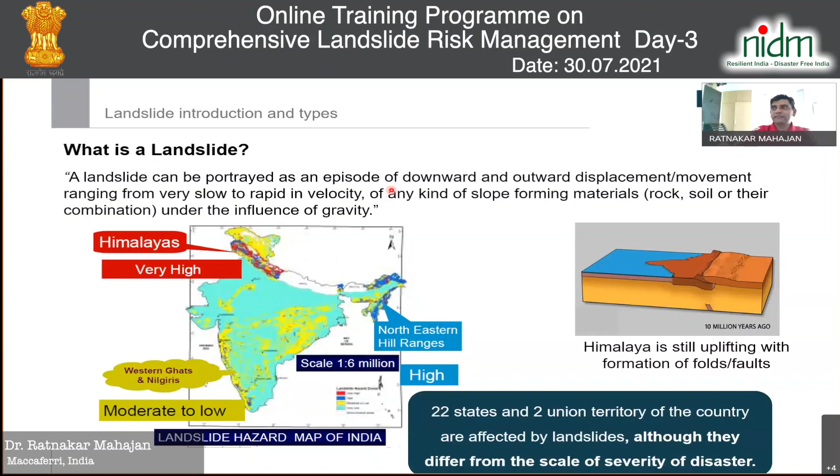So it's one of the major hazards present all over, and usually it gets triggered by, I would say, a mix of different natural factors like rainfall, seismicity, wetting and drying, and other seismic factors. Depending on the type of material you have and the type of geometry, there could be different types.

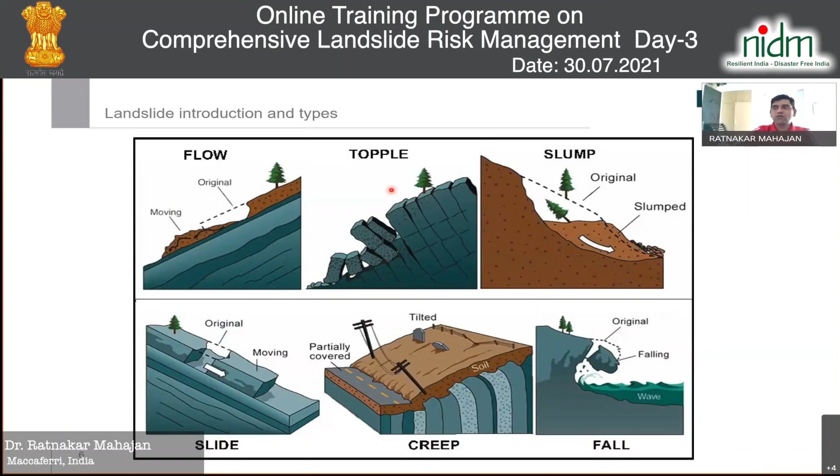There could be a flow of material, or a toppling of rock mass. It could be a complete slump, or due to creep movement of the soil, or the complete structure itself is creeping over a period of time, or there are some overhangs which can fall over a period of time. Typical landslide in the Himalayan region, as well as from one of the project sites.

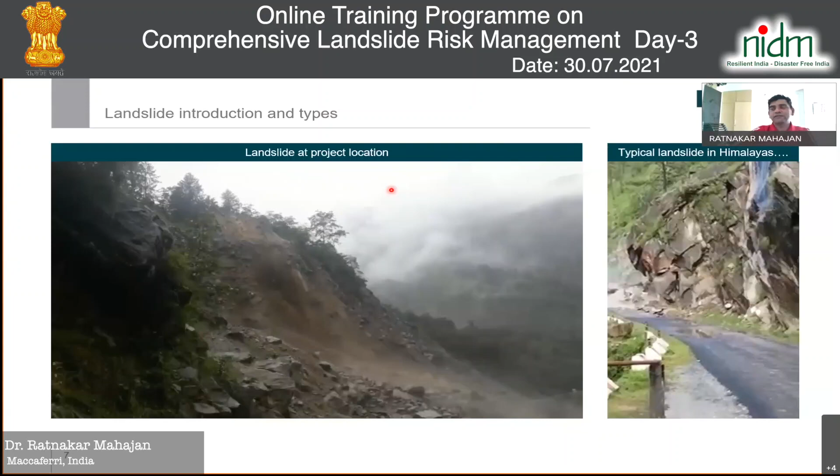I would like to just play this. So one landslide is basically from project one. So you must have seen in previous videos, now you have all kinds of material in this, and you cannot say pure rockfall or something, but it's a landslide with a number of things getting mixed together.

So of course, when we are approaching the landslide, we have to approach with investigation of various factors which are really triggering this instability. It could be natural factors or anthropogenic activities like improper land use or deforestation. The factors could be seismicity, precipitation, if it is at high altitude probably a melting of snow, or could be volcanic eruption, the type of structure, the slope, hydrological, geological conditions, and geotechnical parameters of the material.

So we can relate these landslides to the hazard, and then we can come up with landslide mitigation. For example, if you have an event or a landslide which can occur frequently, but has minor injuries, we may not be worrying that much, or if it's a very minor injury but a remote or improbable possibility of happening, we can categorize it as a low risk area. Whereas if it is a catastrophic hazard that can happen frequently, it could be very high risk.

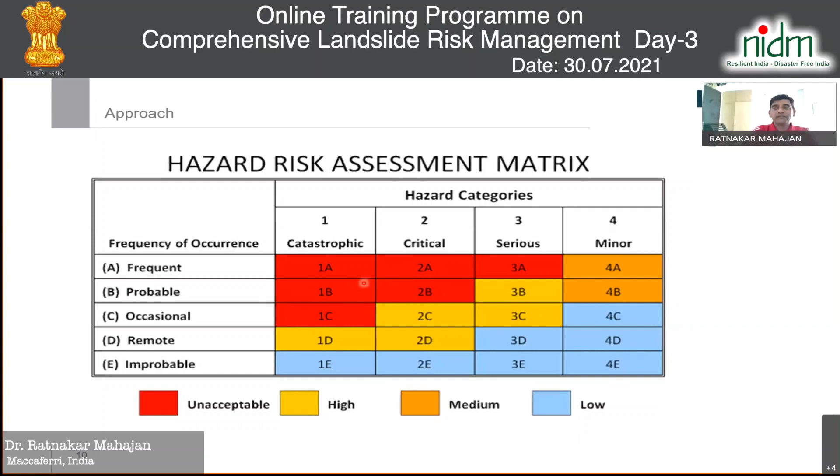So a person who is attempting to mitigate this will first, before mitigation, try to understand what is the risk associated with that landslide, what exactly is going to be affected, and how important it is, because the protection of the structures nearby or landslide stabilization is a cost, and that cost will be governed by the amount of risk you want to mitigate. And sometimes the landslide will be so big, is it really possible to mitigate? That's also a question mark, typically in the Himalayan region.

Now, what are the different types of interventions that can be thought of for this landslide? First, the simplest could be avoiding or eliminating the problem. So if you have something in that area, completely relocate it or remove the slide, or go for tunnels where these landslides will not affect your operations. Could be a railway line, a road, a hydroelectric power plant, or your town itself. If it's a town, then definitely you will need to protect it. But if it's some facility you can relocate, do that.

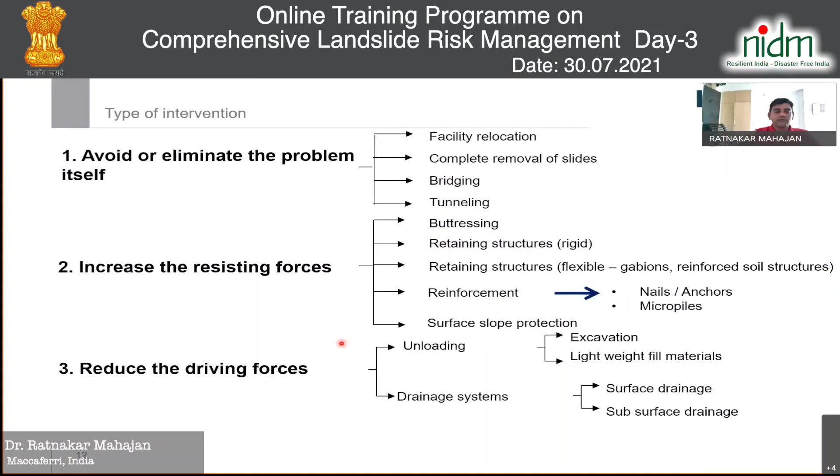The second could be to increase the resisting force. There are some driving forces for these kinds of events, so try to increase the resisting force. Could be in the form of buttressing or providing some retaining structures, rigid, flexible, or a surface protection. The other way around is to reduce the driving forces which are causing these instabilities, like unloading, removal of some soil mass, or improving the drainage pattern.

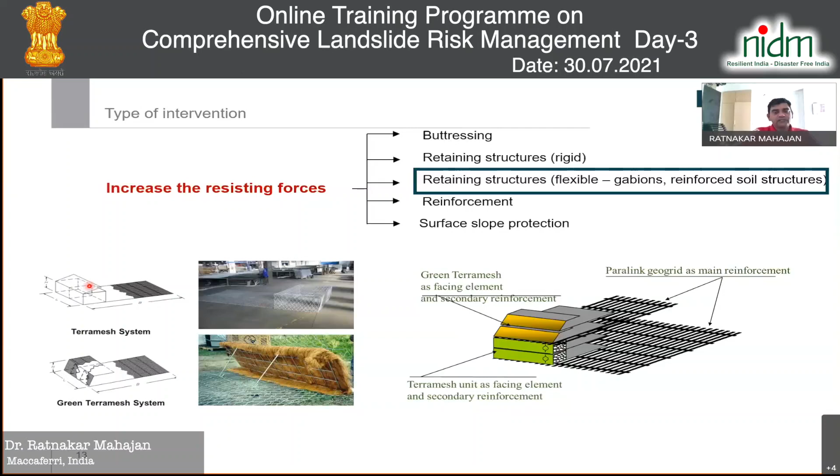So when we talk of retaining structures, today I'm going to specifically talk on flexible retaining structures that can tolerate some movements without losing their integrity. We typically refer to reinforced soil structures like the Terramesh and Green Terramesh systems, made up of double twist wire mesh. Terramesh is basically a gabion fascia with soil reinforcement. Because of the high porosity of the gabion fascia, you have a good draining structure, and because of the mesh, they are flexible structures. You can use these gabions for mass gravity or retaining structures.

So examples like these are photographs from the state of Maharashtra, Sahara Amby Valley, Lake City, where lateritic soil is present, which loses strength when it becomes wet. You must have read in newspapers that, typically in the western part of the country as well as the Konkan area, there are a lot of landslips happening. In that area you have a lot of laterites, which typically lose their strength when they get wet. So in one project, this problem was being faced by Sahara Amby Valley, which was treated by gabions effectively.

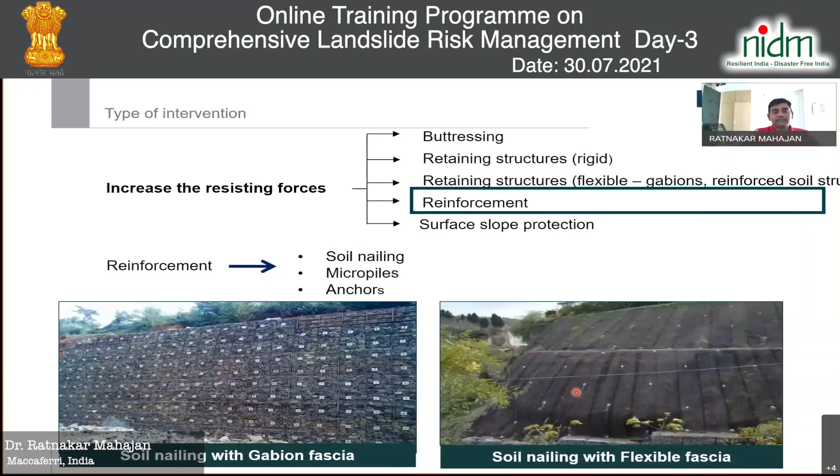When we have to increase the forces, the option could be soil nailing, rock bolting, micropiles or anchors. So you can combine these different options of soil nailing, micropiling or anchors with flexible gabion fascia, flexible synthetic mats or flexible reinforced synthetic mats to increase the resisting forces.

Or a simple way, as you might have heard from local people if you visit landslides typically in hilly areas: local people will say earlier there was a lot of greenery, but since the greenery is gone, there are issues of landslip. So if you are able to establish vegetation, that also takes care of a lot of things.

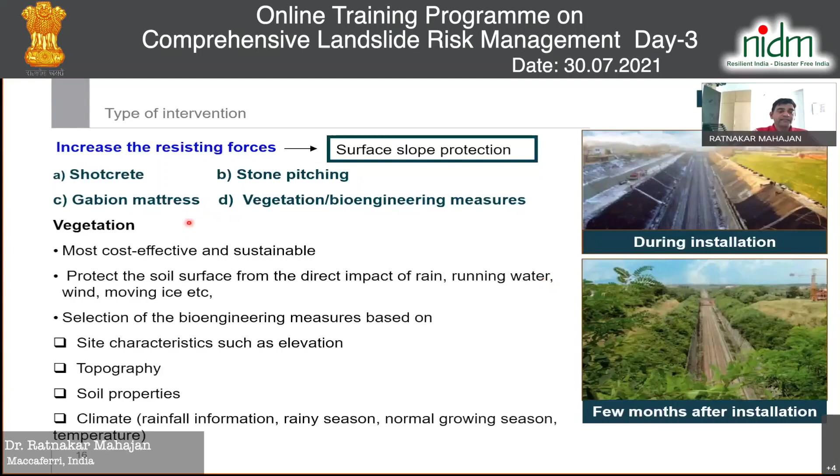Of course, if you take care of the percolation of water, it solves one of the major issues of seepage of water. So here you can do surface slope protection with the help of shotcrete, stone pitching, gabion mattresses or vegetation. A lot of options can be there.

For vegetation growth, it could be done by biodegradable mats like jute or coir, synthetic mats made of polypropylene, or synthetic mats reinforced with a steel wire mesh. The advantage of the biodegradable mat is that it degrades and provides manure for the vegetation growth, and it is easily available in India. This can be used for relatively flat slopes.

Where you are expecting delay in vegetation growth, these synthetic mats are good. And when you are going for very steep slopes, like 60, 65, 75 degrees, you can go for reinforced mats, let's say 65 degrees and above. The purpose of these mats is not to control the complete mass movement, but to ensure vegetation growth.

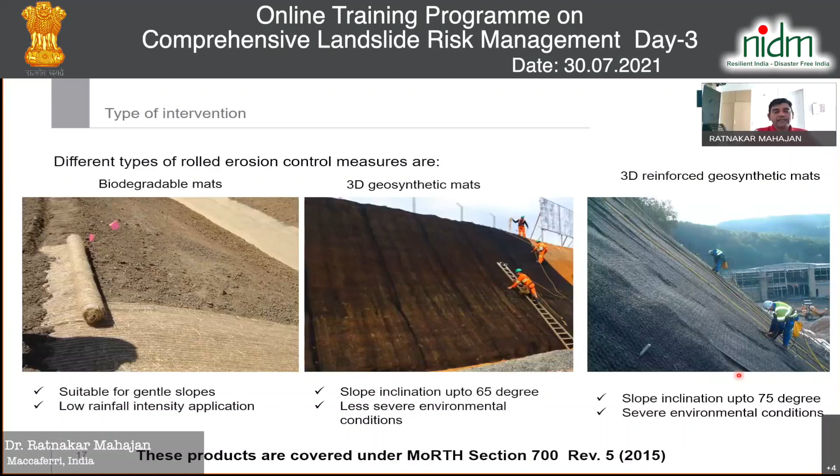Apart from mats, there are a lot of other solutions like hydroseeding or hydraulically applied erosion control measures. In this, basically, water is mixed with the seeds of the grass you want to grow on the slope. Along with that, you add a moisture retention pack of polymers, manure, and certain fertilizers depending on the type of soil.

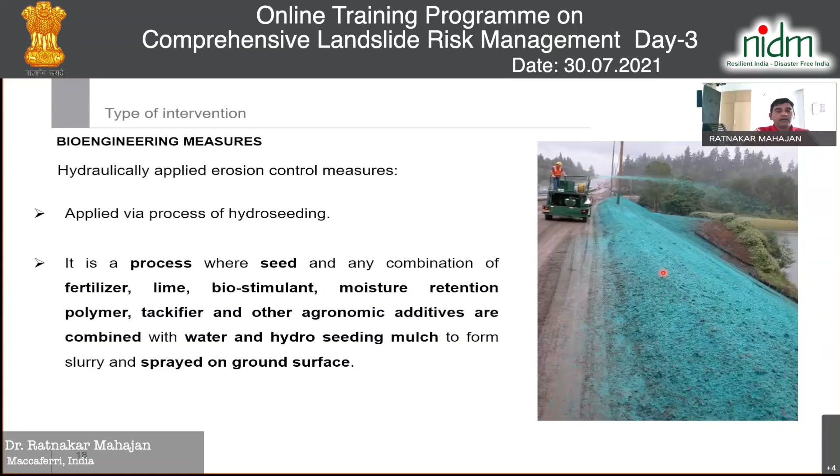So here the most important part is to study the soil, not from a soil mechanics or geological point of view, but from an agronomic point of view: understand how much organic matter is present, the acidity or alkalinity, and what deficiencies are in the soil for vegetation growth. Then you add this, spray it over the slope, and you get very good vegetation over a period of time. Of course, you need to maintain this area till you get good vegetation.

When we talk of landslides, there are issues of rockfall, which can be solved in a number of ways. The simplest way would be to put a mesh on top of the slope where small boulders or shooting rocks are coming. You might have noticed, before any big event, small portions of rock come down, giving a hint of possible movements, and then big masses start coming down, which can be a mix of rockfall and landslide together.

So you put a mesh on the slope and anchor it at the top; this is feasible for limited height and limited area. In case you have space at the bottom, you can leave this mesh open. If space is not available, you provide some additional anchors at the bottom. Whatever rock mass gets deposited in this mesh accumulates at the toe of the slope, is contained by the anchors, and later on you can remove it.

In case you want surficial stability of the slope, you can add anchors across the length and height of the slope. This is a very good solution for containing rockfall, but it is very expensive as it is covered by a lot of mesh. Alternatively, you can put a barrier: on the slope itself, you put a dynamic rockfall barrier which has steel posts and a steel mesh which can catch the falling rocks.

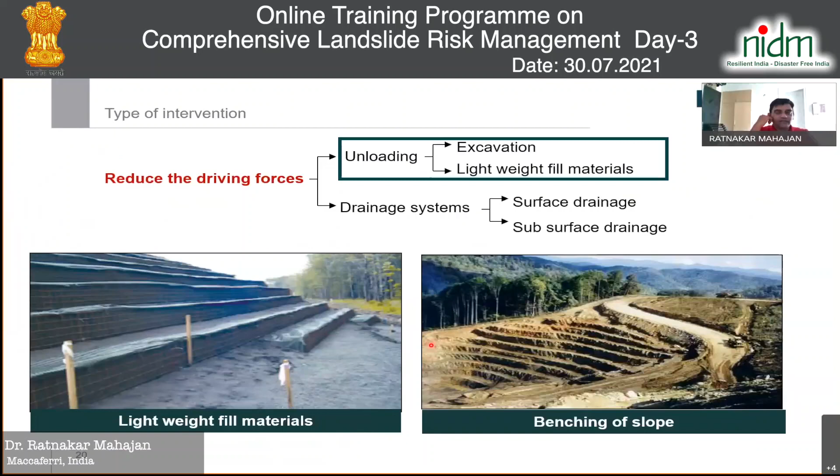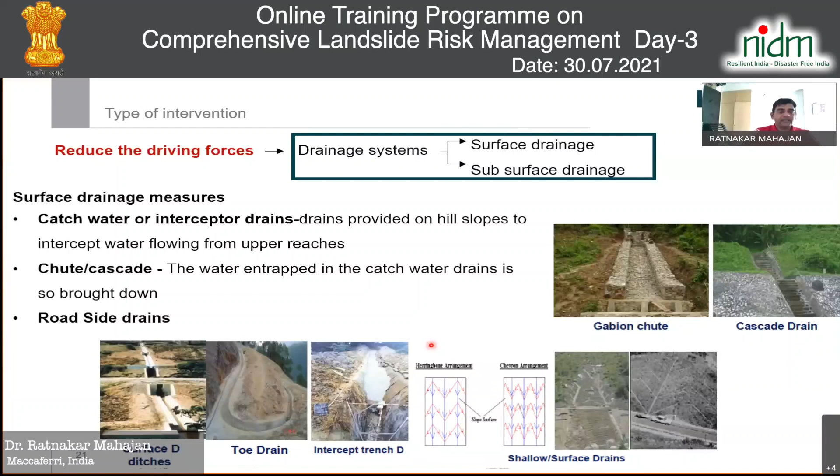And then very important is the drainage. This is the most important part. So study the site, understand from where the water moves, how it moves, and if you are able to remove the water from the site as early as possible, you are minimizing the seepage of water inside the slopes, and the possibilities of further mass movements get reduced. So there are different types of drains like gabion drains, cascade drains, ditches, toe drains, different types of drains to be put in.

Then after understanding the different interventions which can be done, a very important part is design planning, which is very critical for a successful project. Here you need to decide the type of investigation, survey, study to be done. Just to give an example, you have a landslide, let's say a 200-meter high slope, and if you ask the investigation guy to go on top of it where it's not accessible and do a geotechnical investigation with the help of bore logs, it's not feasible. So in such situations, you need to really mix the different types of investigations like geological, geotechnical, and geophysical, and then decide.

Visualize the different ground conditions, collect the data and correlate with the site details so that you understand what is being reported, in what sense it is being reported, and corroborate with the site conditions. Understand what would be the different stages of construction and how exactly you are going to execute the work. Use of local material must be given preference here, because you cannot bring a lot of material into such fragile terrains. Prepare a detailed drainage plan. Whatever excavated material you get, how you are going to handle it needs to be taken care of. Cut and fill should be balanced in such a way that you manage the work there itself.

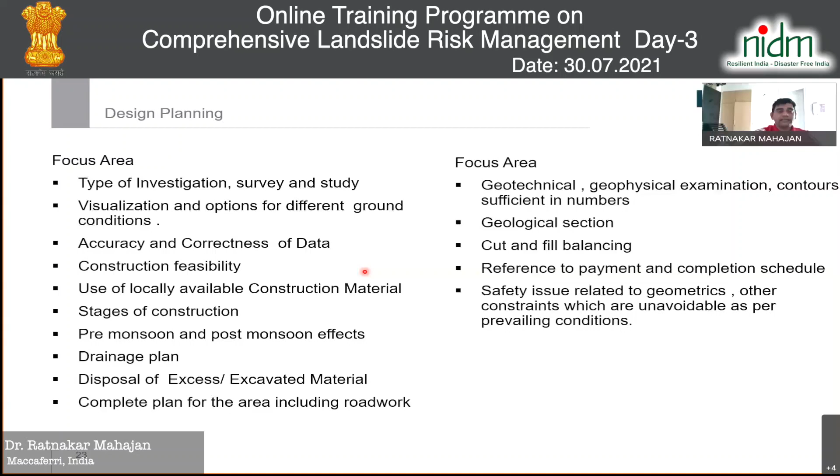After design planning, the most important part again is the construction planning. Like, what is the sequence of activities? Are you going to do excavation top-down or bottom-up? This will govern the type of machinery you will require, whether closure or complete stoppage of the work or the activities in that area. How you are going to handle these things during monsoon, pre-monsoon, post-monsoon needs to be worked upon.

And then most important is the cash flow. The contractor working on site must have a proper cash flow during the project, so that has to be ensured in the construction planning and design planning. You cannot have a bad cash flow for a contractor, otherwise he will not be able to execute the work.

So when we look at these landslides, you have various issues: possibilities of rockfall, possibilities of instability of slopes, which need to be stabilized with soil nails, rock bolts. You can have embankments if you have space to contain the falling rocks. You may need to provide retention structures, flexible retention structures, and drainage. Overall drainage of the site will be taken care of.

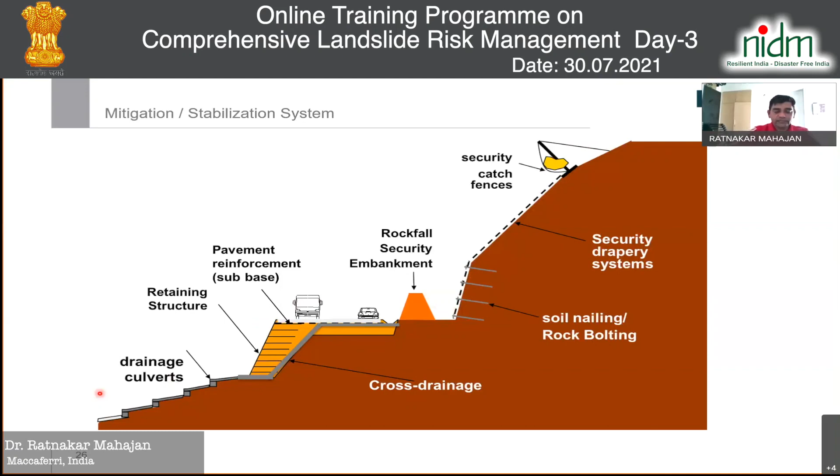So I am presenting one case study. This is landslide mitigation measures in Uttarakhand. This was part of the rehabilitation of the sites after the 2013 floods. There were actually 7 different sites in 2 packages. Due to time limitation, I will not be able to cover all of them, only 1 or 2 I will be covering. So here, 7 different landslides: Nandprayag, Maithana, Birahi, Gulabkoti, Helang, Govindghat 2 and 3.

This is where the project is. So why this was important is, Uttarakhand is a land of gods, where the beauty attracts a lot of people for tourism, for pilgrimage, and most importantly it is a hub for religious travel, like Chota Char Dham, as well as people visiting Badrinath. So that becomes a very important aspect to be taken care of.

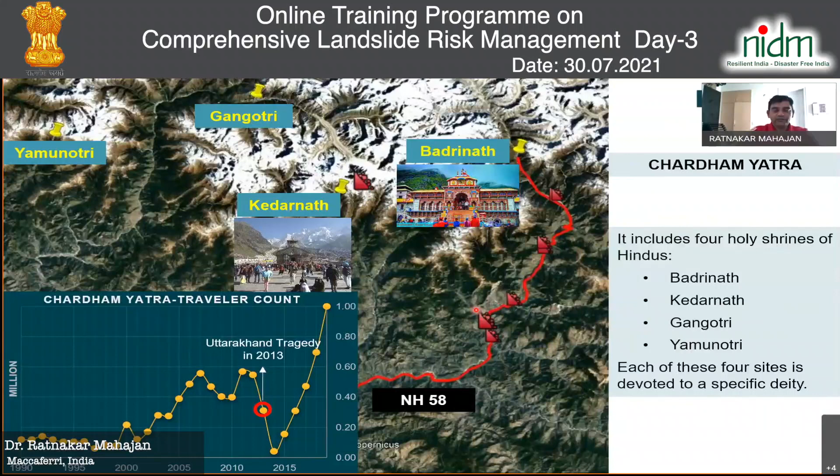So if you see data of people traveling since 1990 till 2013, there was a rise in people visiting Uttarakhand. But after the Uttarakhand tragedy, there was a dip, and then again it started going up, because you have this Char Dham Yatra, and a lot of devotees specifically visit these areas. 2013, I need not mention, everybody knows, was one of the big disasters, and a lot of people lost their lives, very tough stories.

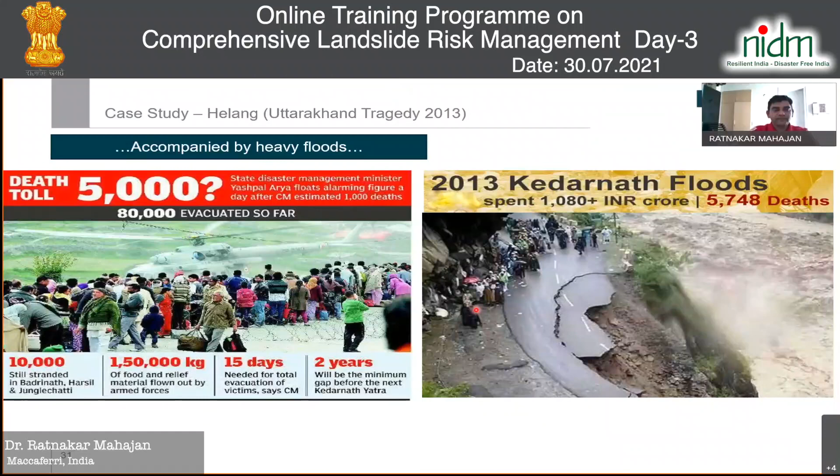So this is on NH 58, covering the different landslides starting from Nandprayag to Govindghat. In this project, the requirement was geometrical improvement of the road and widening of the existing 2-lane road, which will be safe. And the challenge for this project was to keep this road functional during the construction. You cannot stop the road for the yatra. So that's very important.

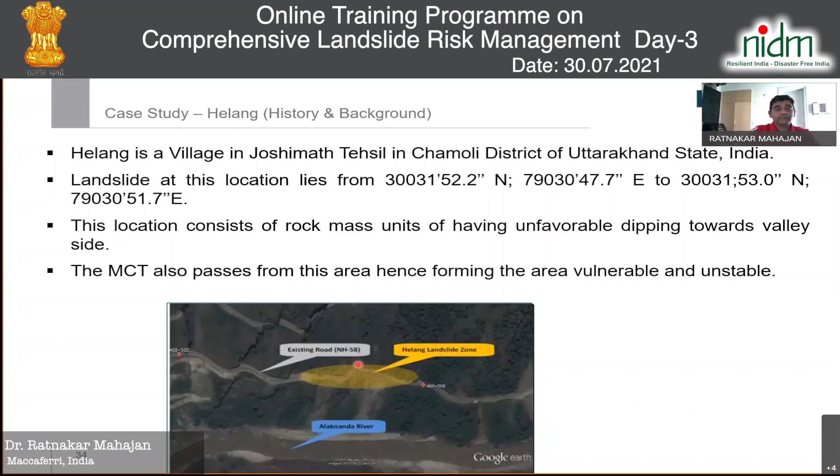So at the beginning, site visits were done to try to understand what could be the probable issues. There were some blocked drainages on the hillside. There were some handmade wire crate walls which were getting settled on the valley side. Over a period of years there have been different floods as well as cloud bursts, and the valley side was found to be sinking, and the rock mass has dippings towards the valley side, which is unfavorable, and very important, erosion of the toe of the slope near the river, which could get washed due to the flashy Himalayan rivers.

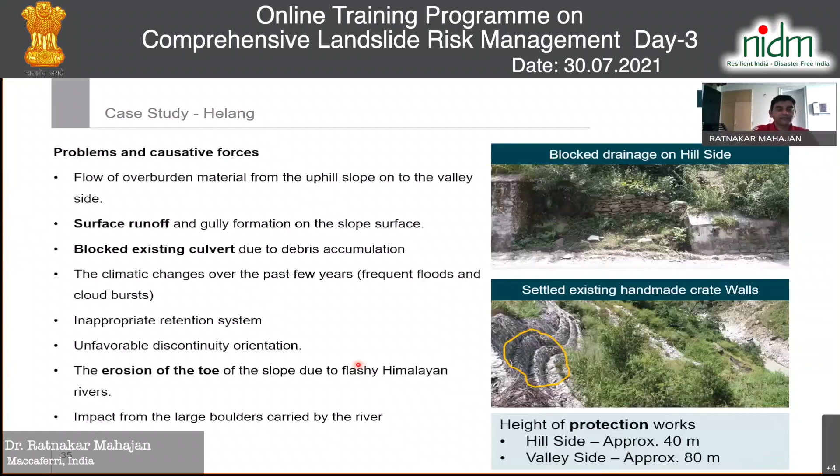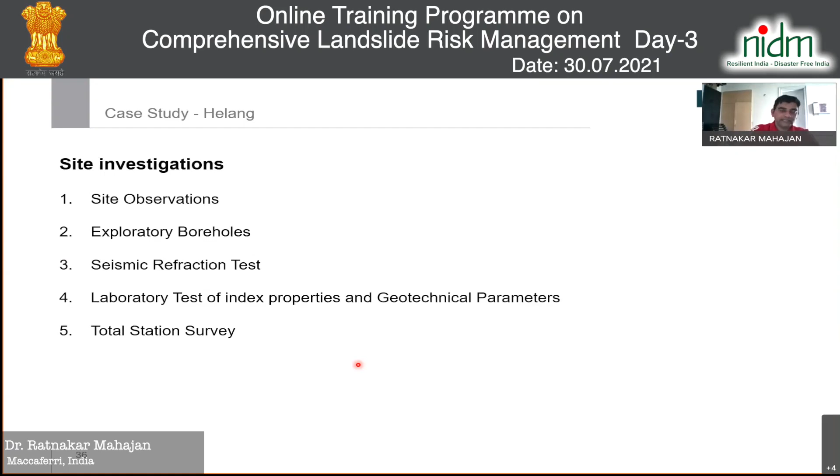So here approximately 40 meters on the hillside and around 80 meters on the valley side need to be protected. So first a site visit, collecting site observations, then boreholes were planned, and as I explained, in such a situation you cannot go up and do the investigation. So a mix of geotechnical investigation and geophysical, like seismic refraction tests, were conducted, and whatever details were collected were corroborated, and then finally a total station survey was conducted.

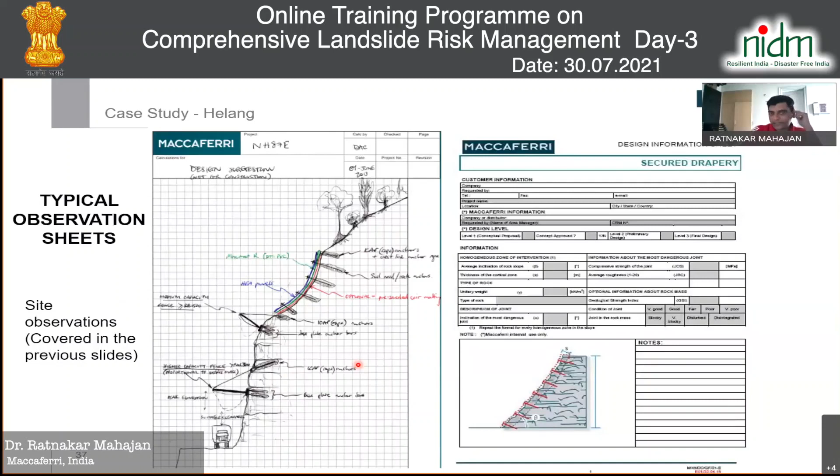So typical observations were made, like the type of slope, what things are located on the slope, collecting information from the site, from pictures as well as sketches, then understanding the type of rock. Here it was central crystalline rock, with formations of quartzites, which are extremely deformed or ductile, different types of mylonites, schist and amphibolites. The geotechnical investigation and SRT gave some results, which I will show you.

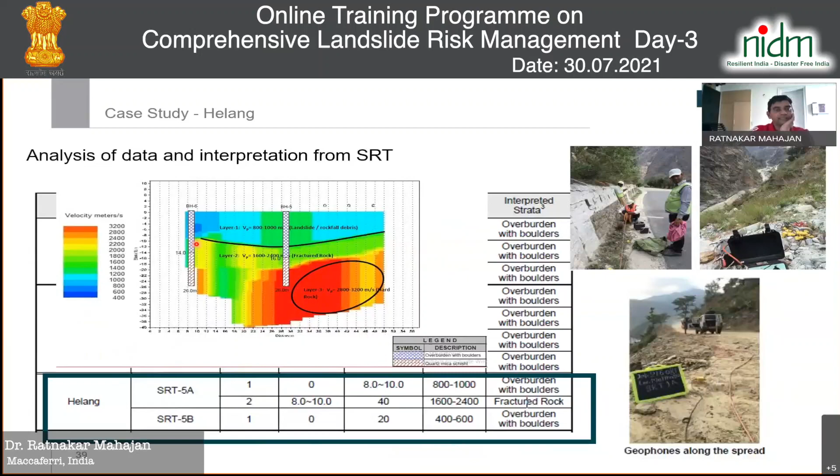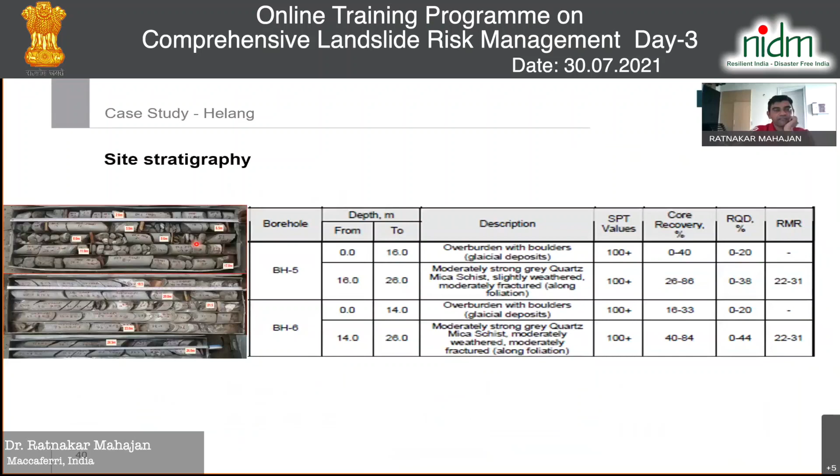So here in the photographs, what you see is the SRT in progress, and this is what we finally got after the SRT, and bore logs were also mapped in that study to decide the type of soil profile. This is the geotechnical investigation being carried out, where the overburden, the type of rock, like moderately strong quartz mica schist, with core recovery, RMR, all these things were noted, and they were corroborated with the SRT data.

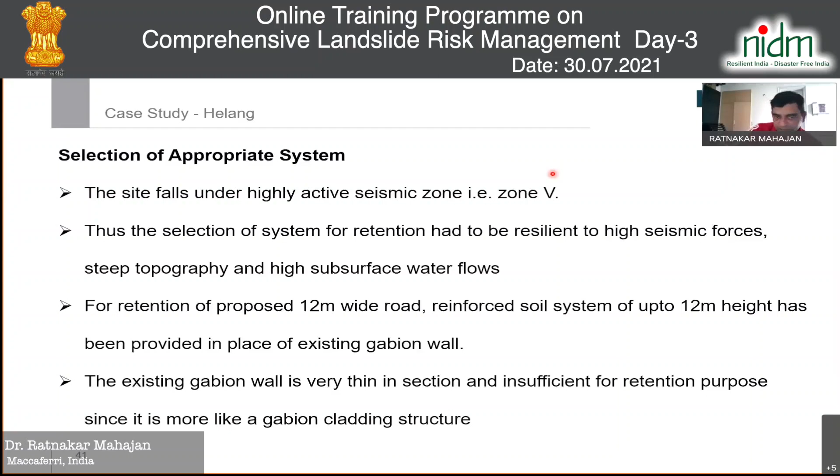So after understanding this, for the design and planning part, as this site falls in seismic zone 5, the retention system selected needed to be flexible. Here around a 12-meter wide road was proposed, while the existing road was very thin, so we needed to construct this road. Typically the option is going on the hillside, you cut and construct, but here a different approach was adopted. Instead of going on the hillside, we went on the valley side and constructed a retaining structure, because if you go on the hillside and cut, it's going to disturb the slope.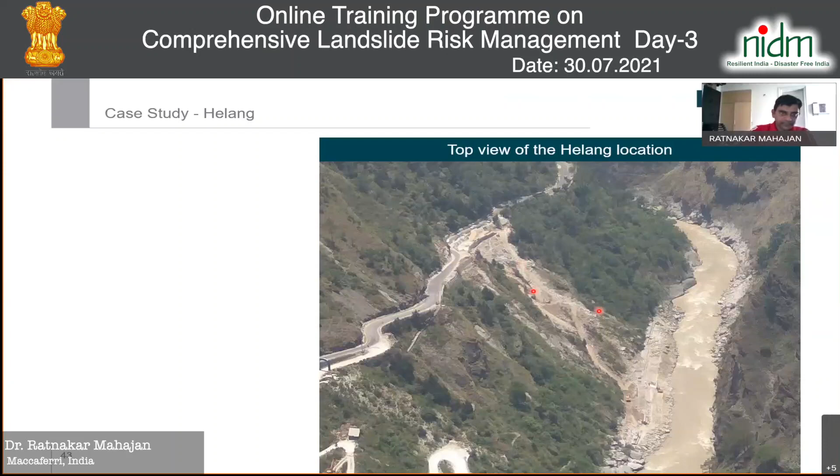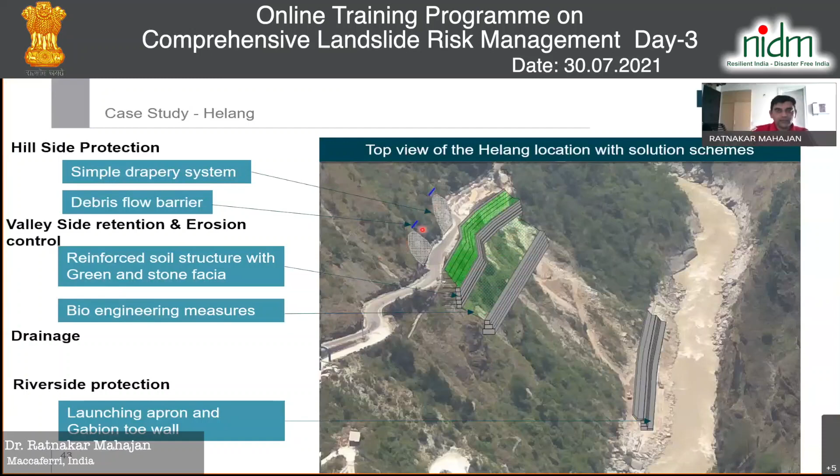The solutions adopted from toe. So I will go from toe. So at toe, a riverside protection in the form of launching apron and gabion walls. In between, there were small retaining structures being constructed. And then here, retaining structure in the form of reinforced soil structure with stone fascia and green fascia. And on hillside, you have a simple drapery system where a mesh is being put, and a debris flow barrier in the form of a small rockfall barrier was being put.

As we discussed, drainage was given proper attention. So a proper drainage plan was prepared with valley side and hillside. So this is basically the valley. This is the hillside. The rainwater, then putting it through cascades, collecting it along the toe drain, and taking this toe drain to the existing culverts, and from there taking the water to the river. That's the valley side.

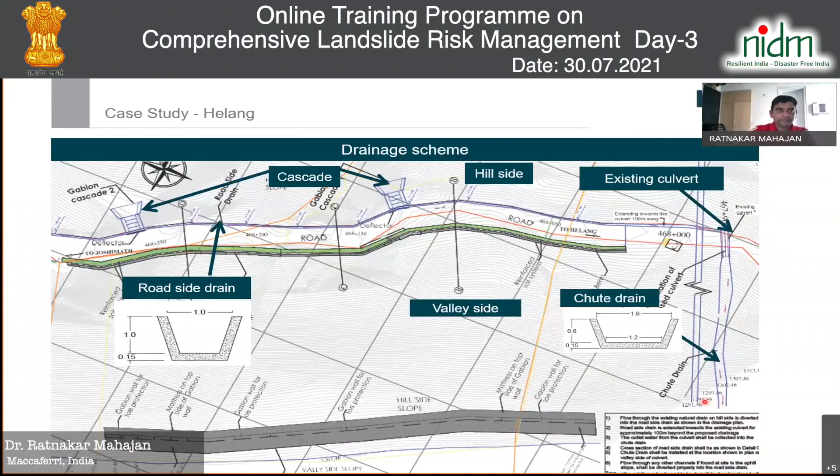Then, of course, for the hillside, when this protection of the slope was there, a drapery system was thought of. So here, the purpose of the drapery system was to contain the rocks in the mesh, so it doesn't come on the road directly, but it will be contained inside the mesh itself. A barrier was being put. The purpose of the barrier is a dual function, rockfall barrier as well as debris flow barrier, because there was a nala which was reported. It can carry some debris during the monsoon period.

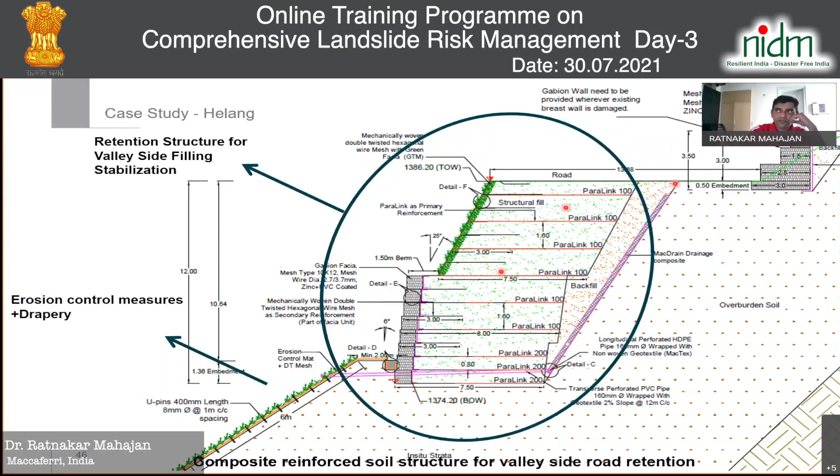And this is the cross section of a retaining structure on valley side. So here you have toe gabion walls for the hillside. This is the road, and then you have the slope with a steep wall here, and then this is on valley side. You will see a solution provided for erosion control measures. The purpose here is to grow vegetation so that erosion shall not happen. The purpose of this retaining structure is to provide a platform for the road, and the toe wall is provided to provide the toe stability.

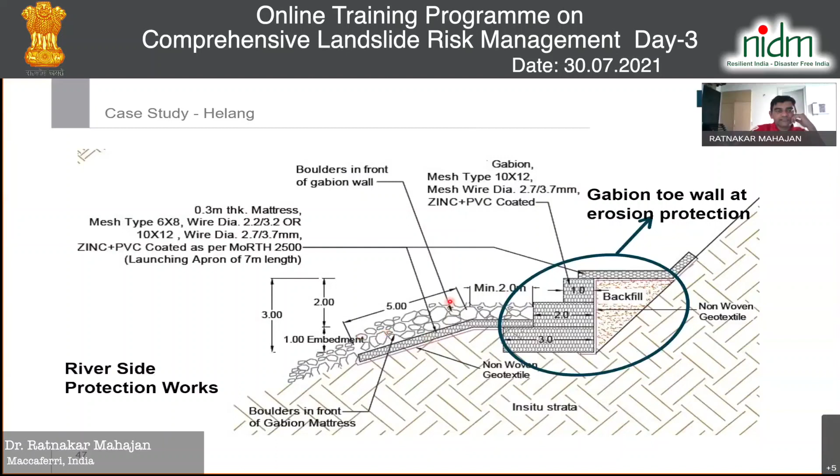This is the section for river side where launching apron of mattresses and gabions were being put. On these mattresses, large boulders were being put. The purpose of providing these large boulders was, these Himalayan rivers carry a lot of bed load, which can damage these aprons very easily. So the first line of defense would be the large, big size boulders, followed by these mattresses.

So the debris flow, what we discussed, was basically at a slope of 45 to 60 degrees, which makes it difficult to construct with the help of masonry or PCC or RCC. So here basically the natural drains were constructed simply with the help of understanding the details, and manually.

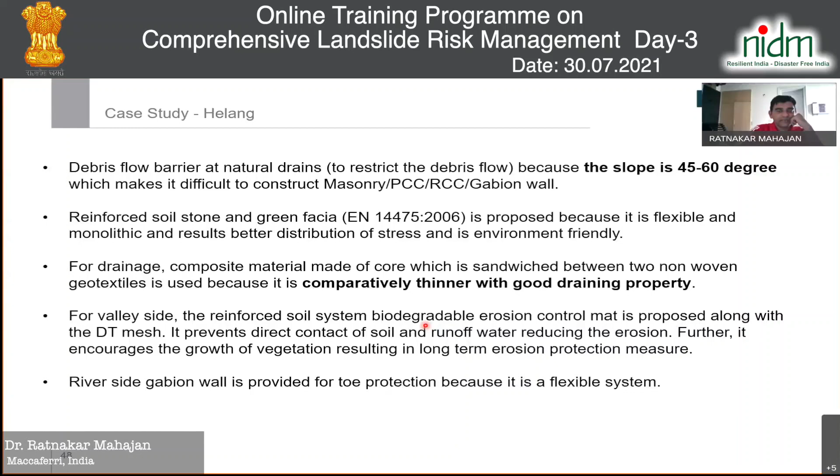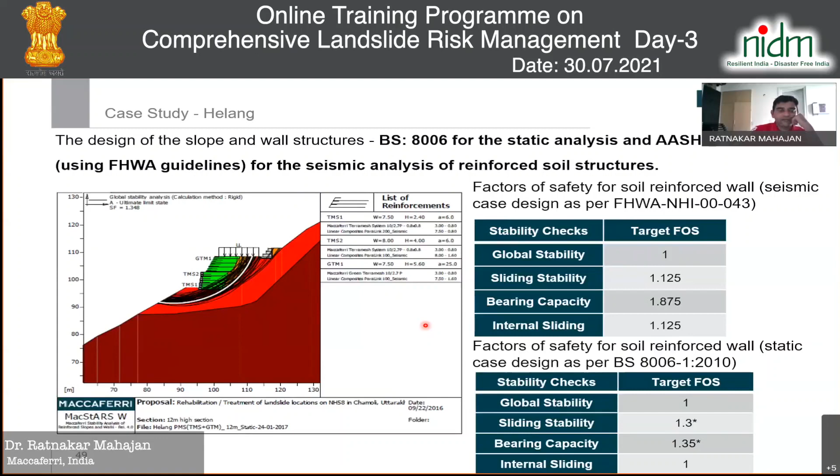Here, reinforced soil structures were being put on valley side, and as we discussed, river side protection with the gabions and flexible mattresses. The designs were carried out for reinforced soil structures as per BS 8006, considering the seismicity as per IS 1893, and meeting all the stability requirements of global stability, sliding and bearing capacity, and internal stability.

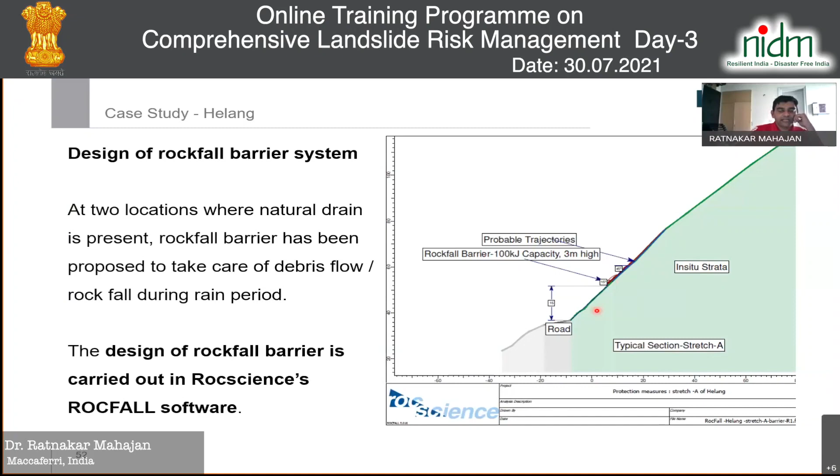For the design of the rockfall barrier, the slope geometry was captured from total station survey, from contours that were modeled in the RocFall software of Rocscience, and then probable trajectories of the falling rocks were simulated, and then accordingly the barrier capacity was chosen.

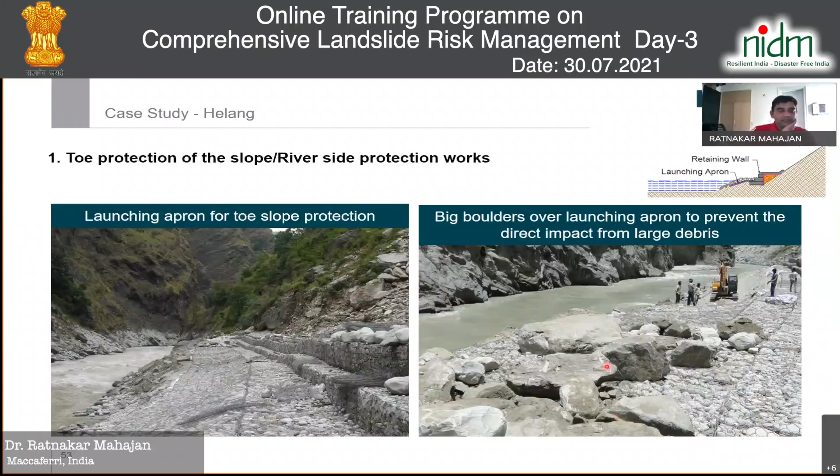So this is the photograph of a launching apron that's being constructed at the river side, valley side, and on this apron, very big size boulders were being put. So whenever you have a very large amount of debris being carried, it could be wooden logs or rocks, they will not damage these mattresses, but these boulders will take care of this protection.

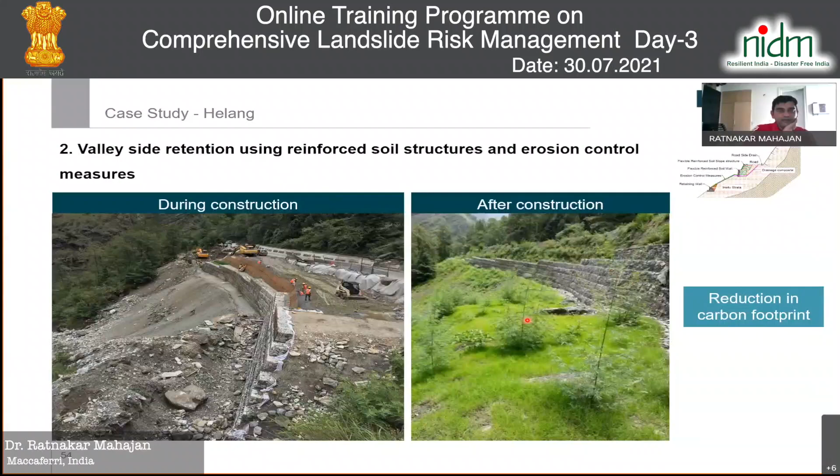A very important part, as we discussed, is the surface and subsurface drainage. We have seen the surface drainage in the previous slide. For subsurface drainage, a chimney drain, or gravel drain, was practiced, which was wrapped in a geotextile behind these reinforced soil structures. So any seepage coming will be discharged easily out, rather than creating a pore water pressure in the retaining structures.

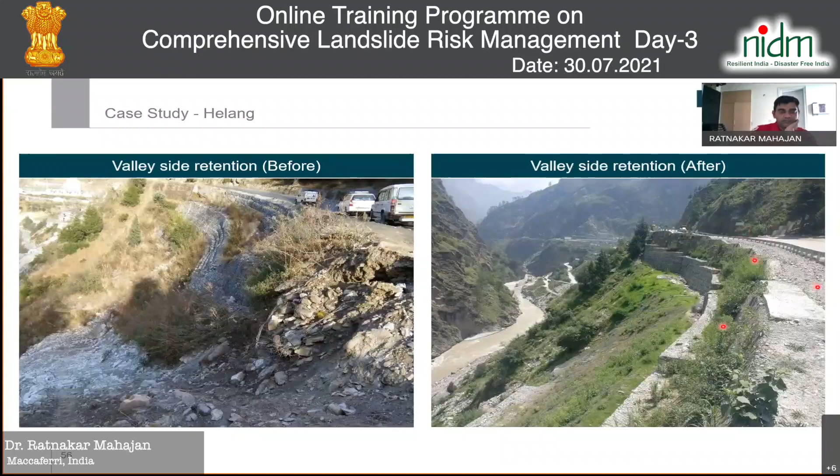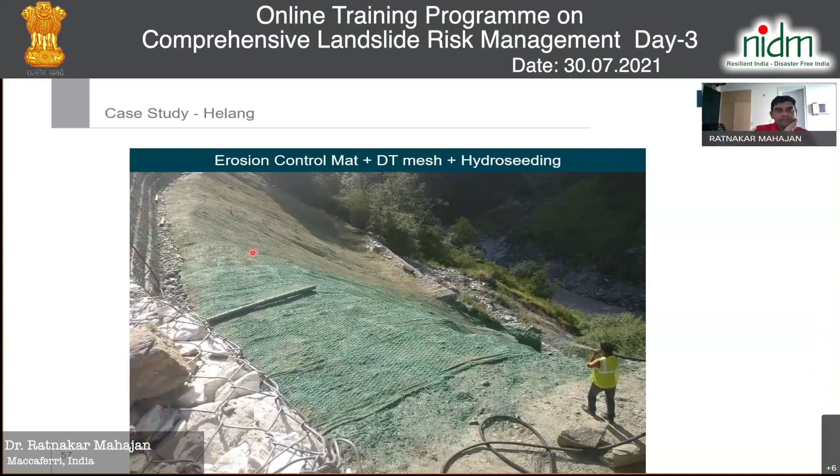These are the photographs of erosion control measures adopted at this site - mesh and erosion control mats combined with hydroseeding. So the effect of this, you can see quite a visible difference between during construction and post construction.

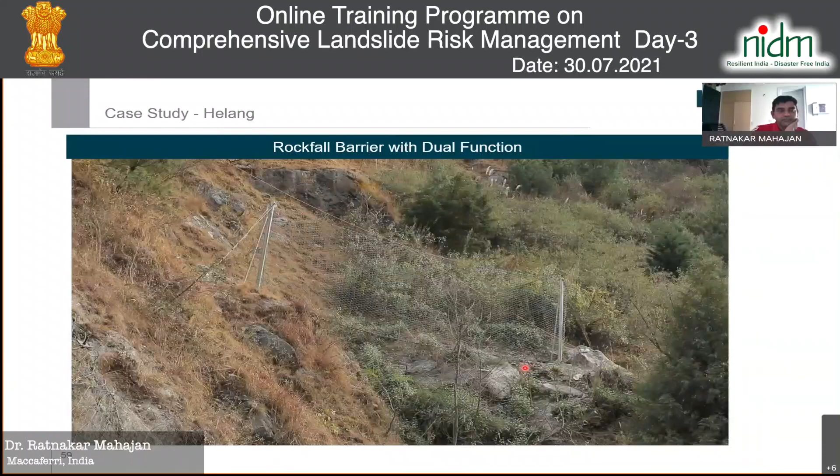And this is the rockfall barrier with a dual function. These are the meshes put on the hillside, a mix of rope panels, steel wire rope panels, and mesh. The visual shows the barrier acting as a dual function of rockfall as well as debris flow.

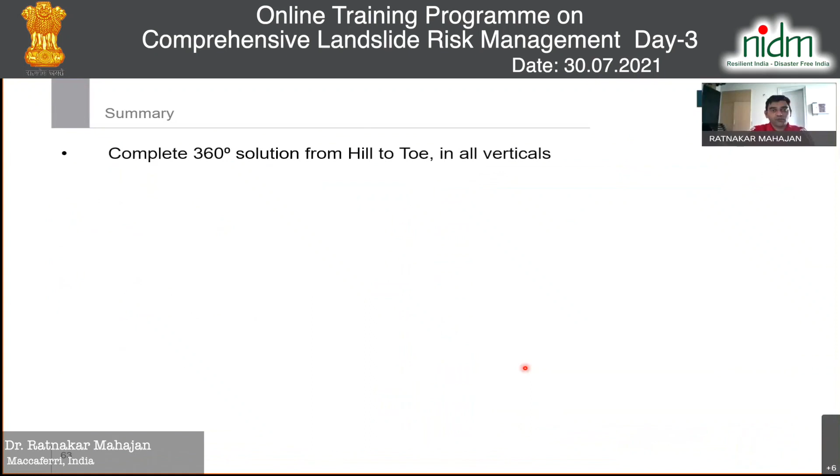So in summary, I would say you need to think completely 360 degrees for a landslide, from hill to toe. That's very important. Drainage is very, very critical, and it's very challenging in these conditions. But if you take care of drainage, surface and subsurface, typically surface, you solve major issues. Provide structures that take care of the site where it's located - if it is highly seismic and moving, go for flexible structures. Instrumentation is very important; due to time limits, I didn't cover it.

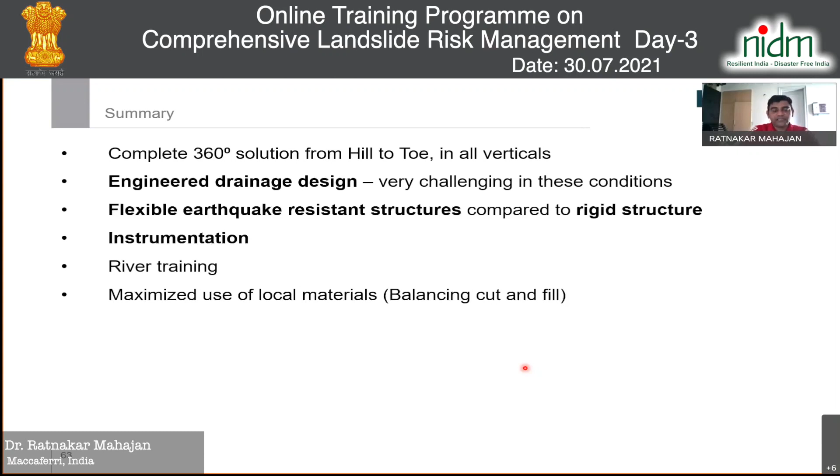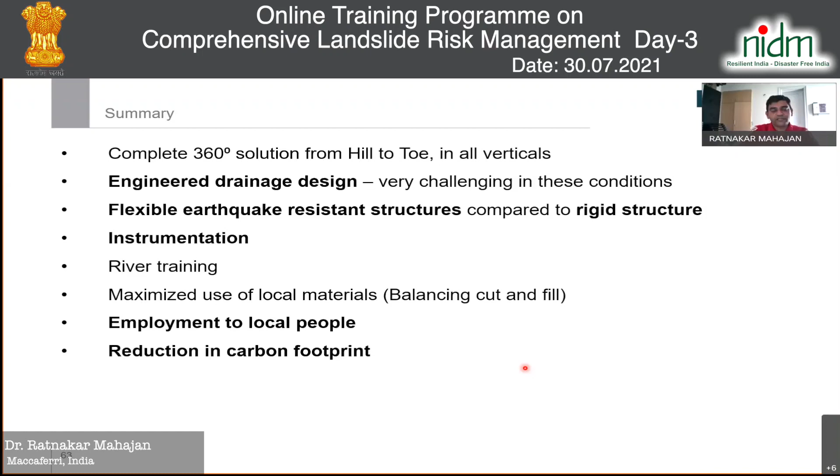But I have a video, if we get time, a 3-minute video which covers all these things I explained in brief. River training - if you are dealing with a landslide where rivers are moving, use local material. In this complete project, we used local material, nothing brought from outside. This took care of employment of local people and reduction of carbon footprint. We didn't go for solutions like RCC structures or other kinds which have higher carbon emissions than what we offered.

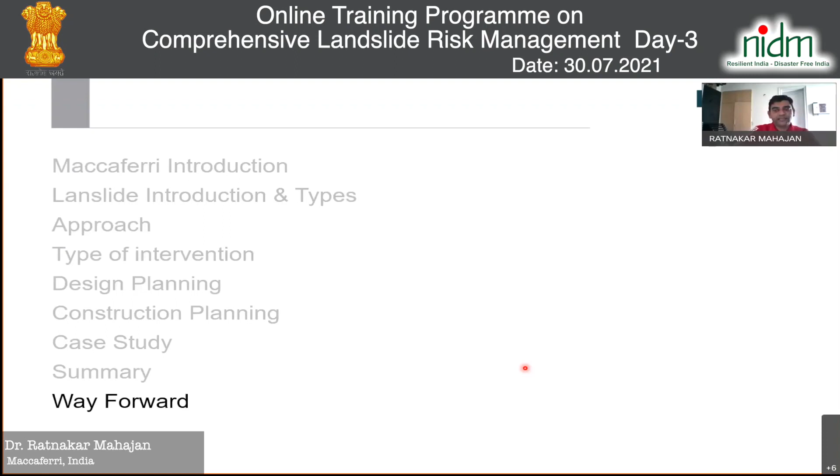So the way forward is, let's look at this landslide from all aspects. Very important - do the investigation from geological, geotechnical, geophysical points of view, and then drainage. Go for instrumentation, and then you can really do this landslide mitigation.

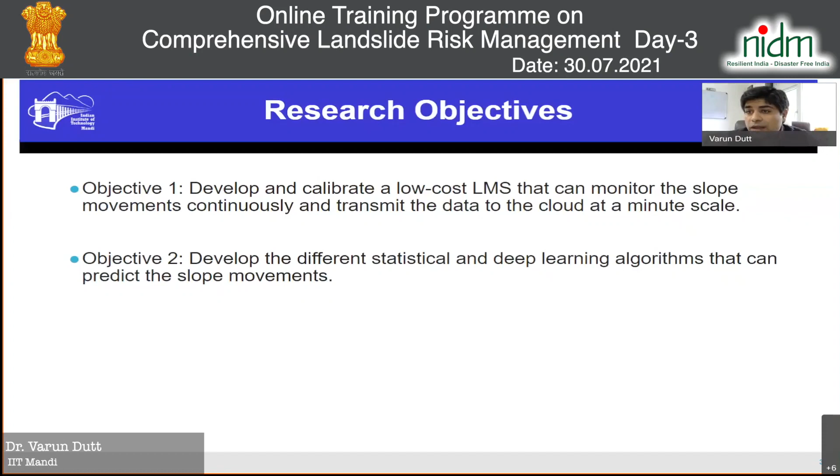So there are two objectives, as I said. One is to present you this low-cost system, which we call the landslide monitoring system, LMS, which can continuously monitor different kinds of slopes, and then transmit the data to the cloud. The second objective is to show you a tip of the iceberg on some of the statistical and deep learning algorithms which we have perfected on our campus here, and which we have also published, to show you how well, or how not so well, they do these kinds of predictions.

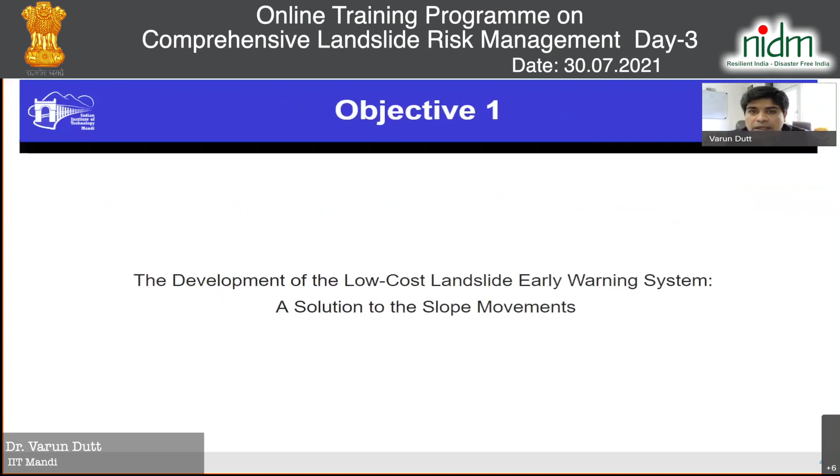So without delay, I'm going to jump to the first objective, which is the development of the system. In this, I would like to first present what is out there, to give you an idea of where we are. So there are a bunch of technologies available, which include global positioning systems, LIDAR-based technologies, GIS, satellite-based, InSAR-based, and remote sensing technologies.

But some of these technologies, while available, require expertise and at the same time are costly. Of course, data is getting freely available now, particularly from InSAR, but with so much filtering and so many corrections being done, and the resolution at a high level, the question is whether these can be used in a complementary manner.

The idea is that for developing countries like India and other developing nations which are affected by such economic losses, we need to come up with low-cost solutions which we can quickly move from one place to another and deploy. They are lightweight, and they allow us to get a sense of what is happening on the ground.

So our contribution here is to three aspects: one is monitoring, one is prediction, and the other is warning, of course.

The idea is monitoring can be done through a low-cost technology, the landslide monitoring system, which consists of a bunch of sensors put in the soil. They may also contain weather sensors, and this may also include the ability to send this sensed data to the internet or to the cloud, where we can catch it at some remote location for further processing, for machine learning and other things.

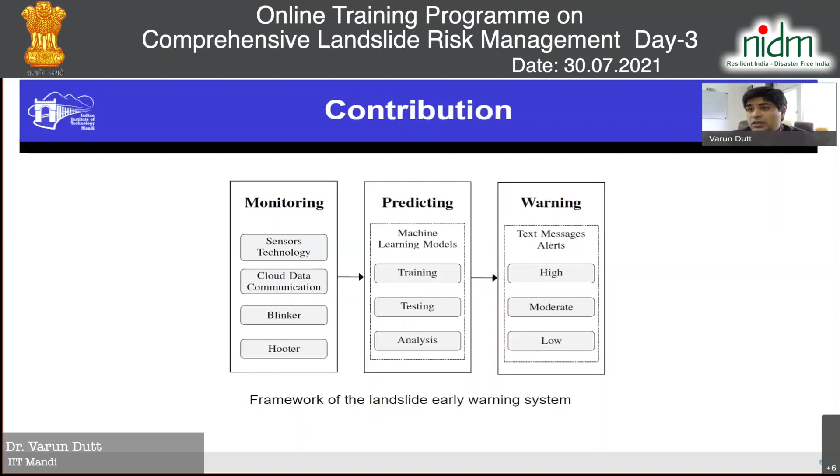Remember that warning is a word which can be triggered when the movement is actually happening, but it can also be triggered based on a predictive movement — say, what will be the movement tomorrow or next week on a certain day. So warnings can address both the current monitoring as well as predictions from the algorithms.

It monitors movements, and it actually sleeps most of the time, but it can be woken up. We have this mythological character, Kumbhakaran — we actually call the system internally Kumbhakaran. Right now I guess it's version 9 or version 10, where what we do is we keep the system sleeping, but a movement triggers and wakes it up. Of course, the food is the movement here.

With the movement, we can communicate wirelessly the warnings, but at the same time, we can sense the data from the sensors and communicate it to the cloud. One other aspect is that there are rain alerts also possible — if it starts raining, if you are sleeping and water starts falling on your face, you wake up. Similarly, a rain event can also wake the system up. In a nutshell, there is data acquisition, data processing, data transmission, and cloud integration happening, among other details.

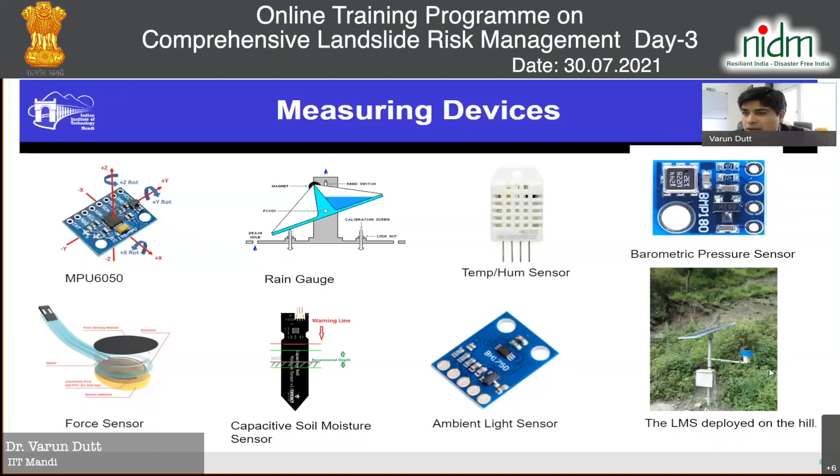So just to give you an idea, we're measuring temperature, barometric pressure, rain, light, soil movement, soil stress or soil force, moisture, and soil temperature as well. So these are the kind of inputs or parameters which we measure. So how the whole thing works. So typically this is how the whole thing works.

We have a system which is deployed on a landslide prone site like Kotrupi. As you can see, there are tension cracks here. And this system is sending data to a cloud. Of course, the system looks like this, which I showed you in the picture. The system sends data to the cloud. There is also maybe a house or a road nearby where we can actually set up a warning pole. And this warning pole is actually connected to this sensor system remotely through Wi-Fi, or you can say radio frequency.

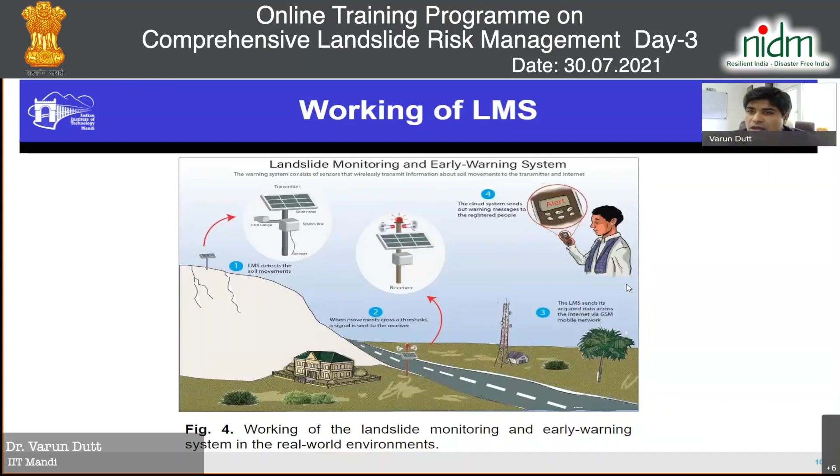And here, these two communicate. So if there is movement here, this gets activated. And you also have a message sent on a mobile phone through a text message. We did a survey, we found still penetration of smartphones is about 60%, 70%. People still use these button phones, some of them. But SMS is something which can be triggered on all kinds of devices. So the least common multiple, or you can say the bottommost technology, is a message. So we can alert people using messaging.

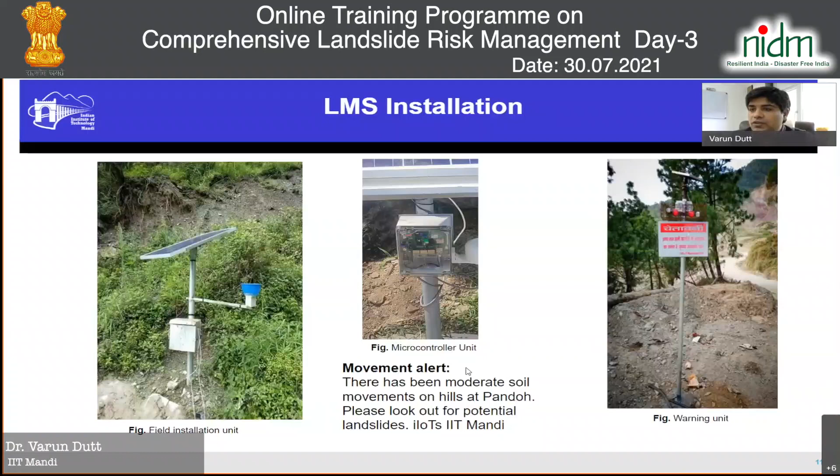So how do we know when to trigger an alert, right? So there the idea is that we can use some statistical understanding. So this is like when the movement is actually happening, how can we timely alert people when the movement starts to happen, and when to alert and when not to alert. So the idea is that we can quantify different movements to be distributed, in this case, normally or according to a distribution. And a normal distribution seems to approximate this nicely.

And then try to find out how deviant we are from the mean. So what percentile are we talking about? Is it 2 standard deviations away? Is it 3 standard deviations away? How far away is it? And based on how far away it is, the more deviant the movement or the amount of movement is, we can generate a stronger alert.

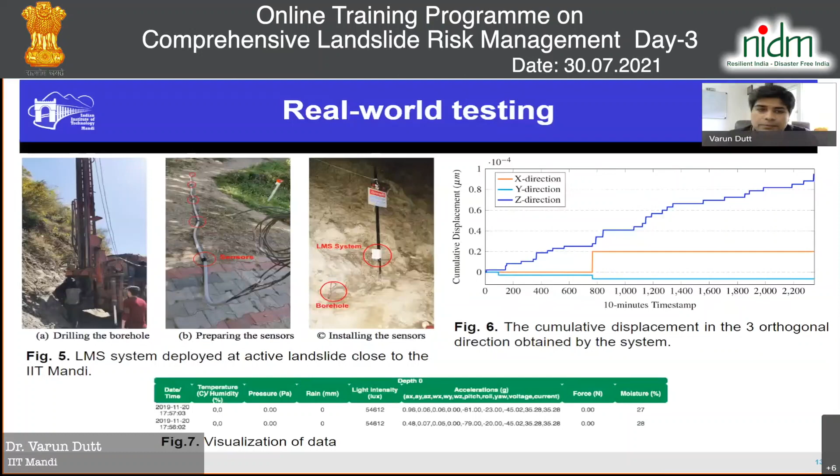So just to conclude what I presented right now, it's a subsurface or a surface-based system. The subsurface system can go even 10 to 15 meters deep. This was made right on the campus here. It's Make in India. And it allows us to generate warnings and do measurements. This is something which you can use wherever you want to. It's very portable, lightweight. This whole pole, I can literally take it out and put it somewhere else. It's not very heavy. I can easily carry it in my suitcase. This box is very small.

So the other thing is, can we do something now? If we are able to monitor and warn, can we do something about prediction? And what can we do about prediction?

I just wanted to check from the anchor how much time I have left. Can somebody give me an estimate? A minute, 2 minutes, 5 minutes? No, you have more than 10 minutes, sir. Okay, cool. Very nice. Thanks.

So the second objective of the study is, if we are able to measure and monitor movement now, can we go ahead in the future to become that foreteller? What will happen? Can we get an idea of what will happen tomorrow or 1 week from now? So that's where the statistical machine learning and deep learning things come in. And this is the second objective I'm going to show you.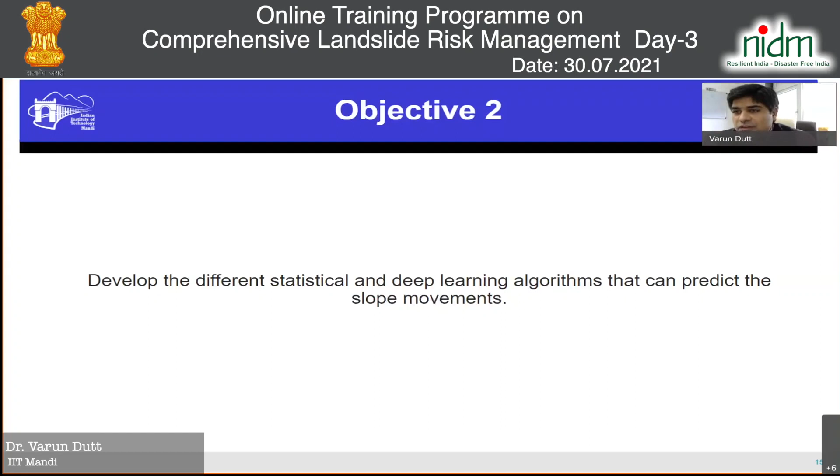Again, we have done lots of work. We've trained about 30, 40 algorithms in machine learning. With Dr. Uday, we have been working very actively for the last 2-3 years. So the objective of this is just to give you a tip of the iceberg. As you know, very little of the iceberg is above the surface. So just to spark your curiosity; of course, we can have a discussion if you want to know more.

So essentially in machine learning, of course, the world started with statistical inferences. And one of the very familiar models available is the ARIMA model. The idea is that if something has happened in the past, can we learn from that to predict the future? And in this situation, what we are learning from the past is the moving average of the movement. So if we know the movements in the past and when they occurred, can we use them to predict the future?

So the auto-regressive is basically the idea that it's the regression model, but the beta coefficients on the right side, the independent variables, are actually time variables. So this is movement at time t+1, the move we are trying to predict, given the movement at time t-1, t-2, and so on. And so this is actually being used.

Our Chinese counterparts have been very active at their landslide sites. If you've been reading about this, Baijiabao and Baishuihe are some of the very popular landslide locations in China, and they've been doing this. Recently, we found that this Chinese group, Shiluo and others, started working with recurrent models, which is this long short-term memory model.

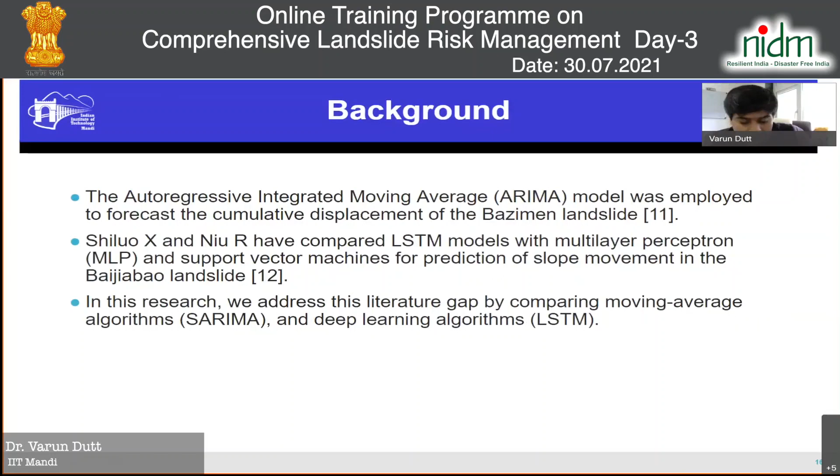So anyway, we've done some literature review and we found that there was availability of the ARIMA model and of the LSTM model, but people had not really compared ARIMA with LSTM models, and had not done something new in this area. So we embarked upon this research and we chose a site. Of course, I will also show you data on how this algorithm works on our sensors. Our sensors we started putting 2-3 years back. Data sets take time to build, and some of these deep learning approaches require a lot of data.

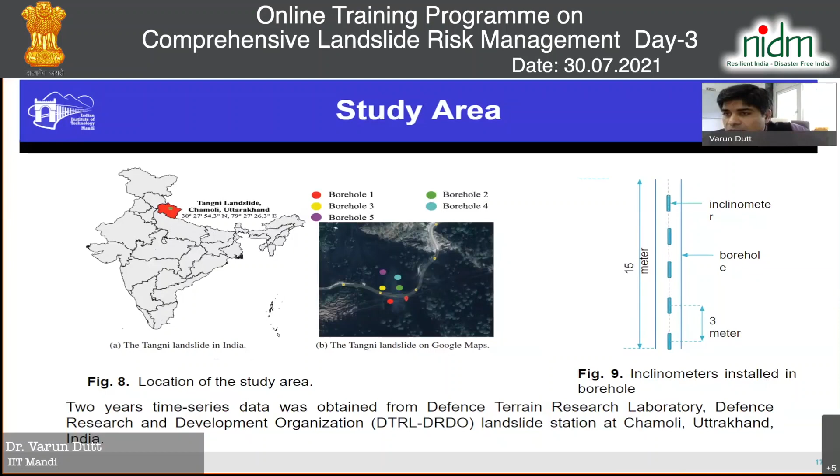So the site we have taken is where the Defence Terrain Research Laboratory, DRDO, had set up their sensors, a conventional geotechnical monitoring system using inclinometers, with 5 boreholes. This is the Tangni landslide on the Chamoli-Badrinath road in Uttarakhand. Each of these 5 boreholes has 5 sensors, inclinometers at regular depths, every 3 meters, from 3 to 15 meters. So we took this data for the last 2 years. It comes from a reliable source, so let's see how well the algorithms can do.

Just to give you the theory, SARIMA or ARIMA kind of models learn from the periodicity and from the history of data. The idea is we need some training data and some test data; we train the model on the training data and test it on the test data. The difference is that during testing we don't calibrate the parameters, we just run them as is. During training, we try to find the best fitting parameters, where the model curve comes closest to the actual curve.

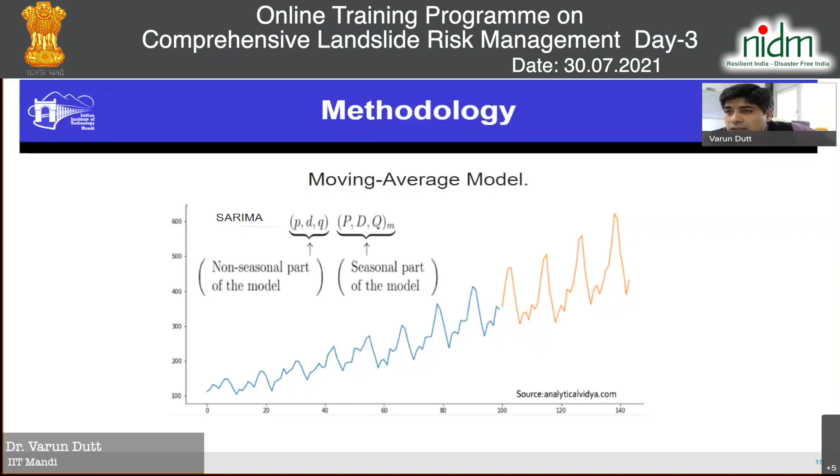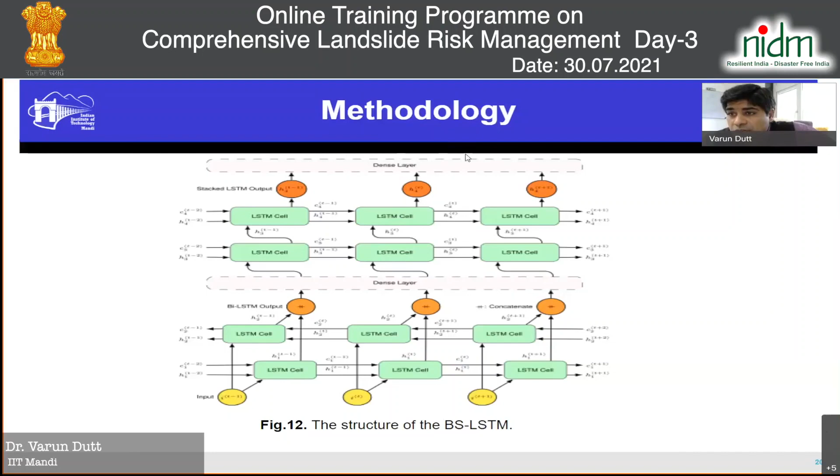And then we have a stacked LSTM, where these cells are just talking linearly from one side to another side over time. So what we're doing in this model, we're trying to apply time elapsed movement inputs, run them through this model with these parameters, and then finally get a prediction of the next movement at t+1 and compare it with the actual movement during training to train the model.

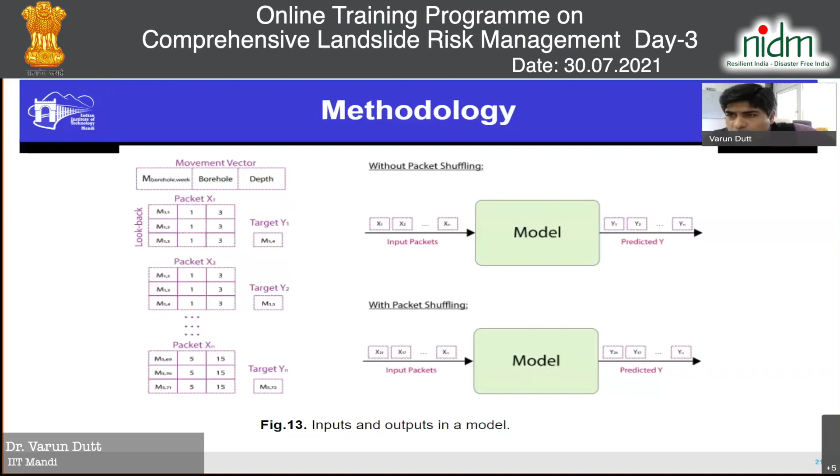So if it is M11, M12, M13, we're trying to predict M14, which is the next time. The idea is this whole packet comes with the input and the output. Now you can put them in a bag, put them into a model and see how well the model performs. We've tried with shuffling and without shuffling, and there are some advantages to that, including dropouts and others. I'm not going to go into detail, just to give you an idea how we put the inputs and outputs.

There are a bunch of parameters in both models. The LSTM has the layers, the look back period, epochs, batch size, hidden units, number of neurons, whether shuffling is on or off, whether there is dropout. Dropout means we randomly remove some nodes from the network. Looks very crazy. The idea is to avoid overfitting, where the model does very well in training but doesn't perform well in the test.

And the other side is the classical ARIMA, or autoregression model, where we have these look back periods, typically for the moving average term and for the error term. The differencing is basically the stationary parameter. And then there are the seasonal analogs of those. So we have parameters on both sides. One is a statistical model and one is a model which has some memory in it, and we see how it performs.

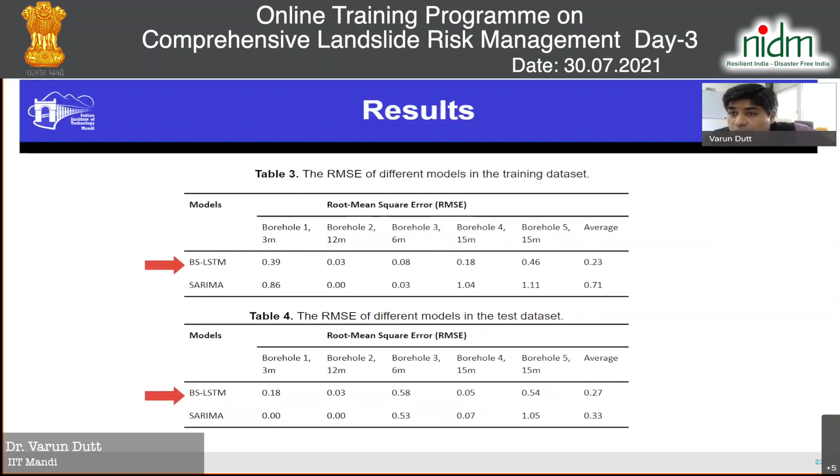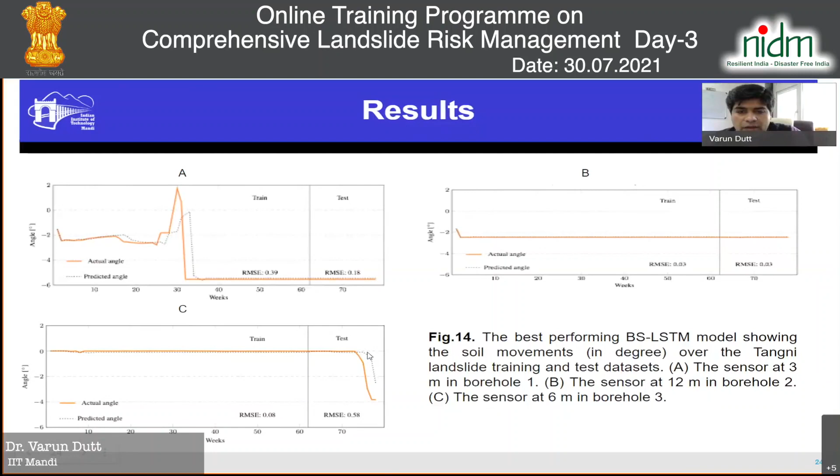These are just the plots. The orange curve shows the actual movement and the dotted line shows the predicted movement. Here it does well. Here there is probably a little bit of delay. Some places it does really well, but on average there is a deviation of 0.23 degrees.

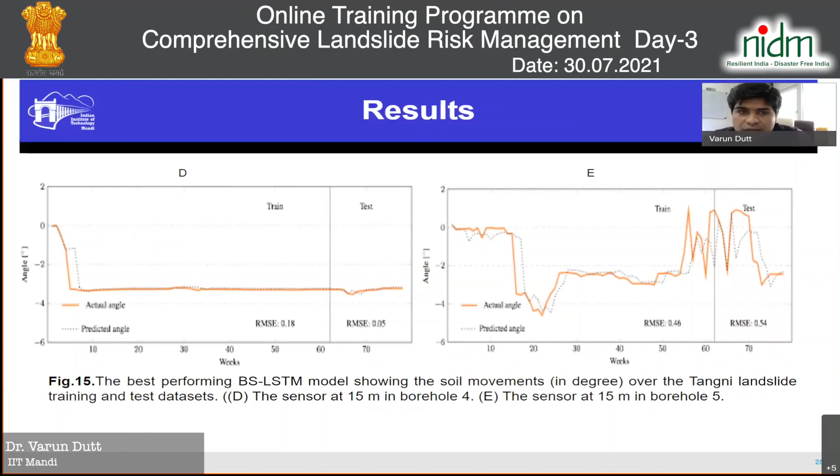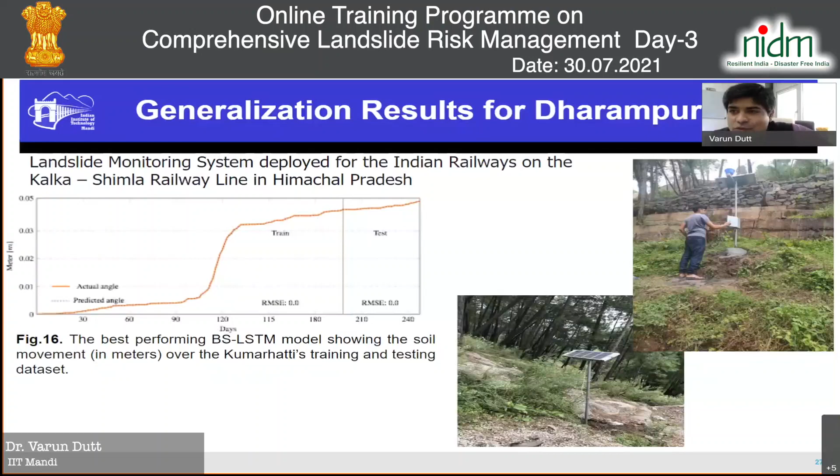So I'll just conclude by saying that we started with the Tangni landslide data. We've calibrated LSTM; in this case, the BS-LSTM model is a slightly more interesting architecture. And we found that it seems to perform relatively well in training and test. We've also compared this with classical models like SARIMA, because our colleagues in the literature have been using such models. And we found it performs relatively better, 1/4 or 1/3 of that. The error is much less.

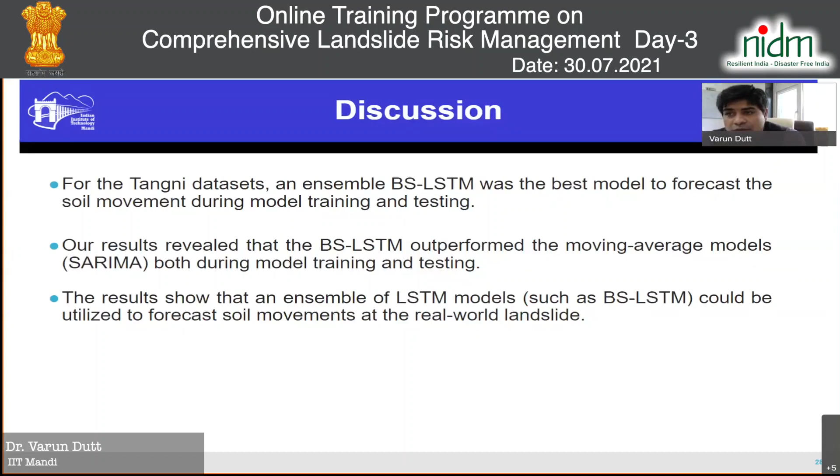And so we can actually ensemble such models and we can create more sophisticated architectures, and they can be used to forecast the real world, like I showed you the Dharampur data. Of course, I didn't tell you too much about it, but the idea is to give you just a snapshot. So what is in future? There are a bunch of things we can do in future.

See, we've been going weekly, we can go hourly, we can deploy this monitoring system at a number of locations in different parts of the country. And of course, we can plug in the BS-LSTM and see how it predicts movement and gives an indicator of where the movements are likely to happen ahead of time, and see how well it performs in the real world.

One other interesting thing is that right now we have multivariate data available with us. We have rainfall, we have light, we have temperature, relative humidity, soil temperature. We started with univariate data, movement, predicting movement. We should actually bring in these parameters. We started doing this already.

So how does a multivariate idea, when you have other predictors in such models, allow us to do more? In a SARIMA model, bringing it in as an exogenous variable, or in an LSTM model, making that packet richer: not just movement, but a bunch of other attributes which allow us to predict movement better. So these are some of the ideas of future work.